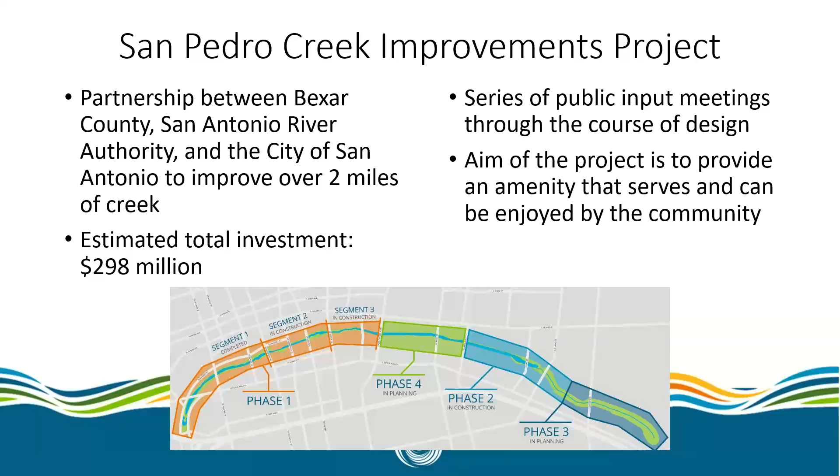We did have a series of public input meetings throughout the course of design. We welcome all tourists and visitors from out of town to the park; however, the vision and design of this project was geared to the people who live and work in San Antonio and Bexar County. So the aim of the project is to provide an amenity to the people who live here that can be enjoyed by the community — something you'll be proud of, something you'll also take your out-of-town relatives and friends to see in addition to the Riverwalk.

The main project goal here is flood control. The Bexar County funding is flood control dollars. There's about a 45 square mile area that drains into San Pedro Creek, and we do have the flood control tunnel. This is to capture all the runoff that comes in between the tunnel inlet and outlet, as there's frequent flooding during heavy rain events.

But that's not the only goal — we had additional goals. Water quality is a core value and mission of the San Antonio River Authority, and as such we're incorporating low-impact development features, mechanical devices, and aquatic plantings to help improve water quality. Of course, with any public works project, realizing a benefit through economic development is always a plus, and this project is expected to return about $1.5 billion for that $300 million investment.

I mentioned community engagement before. We had a series of public meetings and asked for input from members of the public on the design, and they were very well attended throughout. One of the things that was very important was to emphasize the cultural history and heritage and the linkages of San Pedro Creek to the culture in this area.

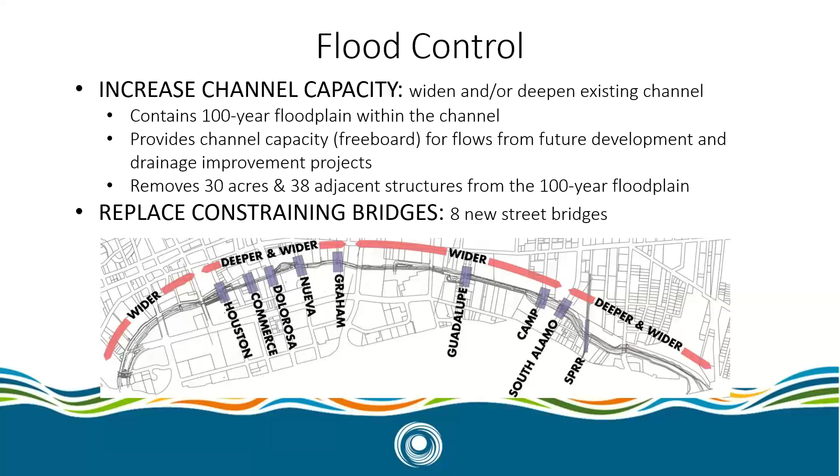To do that, we're having to replace 8 bridges, which you can see in the inset below. We've already replaced the Commerce and Dolorosa Street bridges, and right now, very near the site, they're working on replacing the Houston Street Bridge. Next slide, please.

Just real quick, this is a representation of the area from Houston Street upstream. At the very top, you can see the track around the old former Fox Tech football field, and the tunnel inlet structure is just below that. The blue indicates the 100-year floodplain. On the left is before project completion; afterwards is final completion, and you can see it's contained completely within the channel in the after picture.

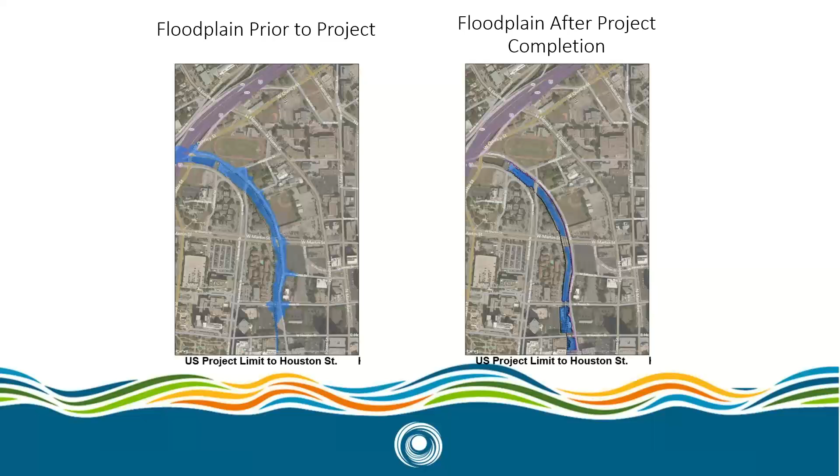As they started digging more gingerly and investigating, we uncovered a series of foundations. So right now, this public meeting and this effort is to determine what we do with those foundations moving forward.

The plaza design incorporated feedback from the community, including stakeholders nearby like Texas Public Radio and the Alameda Theater. The intent was to have a public gathering space that could provide activation and programming opportunities, and would also bring people closer to San Pedro Creek.

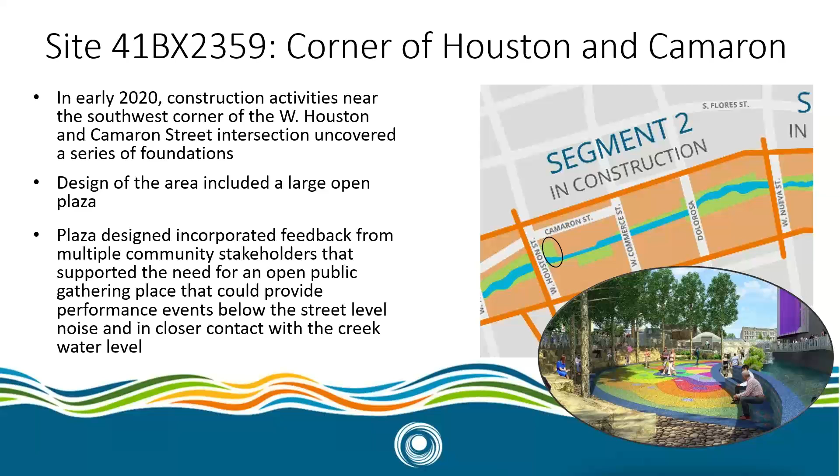So at that point, we're now looking at the options. I'm going to stop and turn it over to Steve Tomka to talk more about the discovery at the site. One thing I want to reemphasize, as Steve will note, is that we feel all the options give a great representation of the history—the differences are in what each option provides and the impacts to the design and the project. That's why we're here, and we need your help. We know this is extremely important, and we've always held it to be so, but we need help determining what to do.

So with that, I'll turn it over to Steve Tomka. Thank you very much. Thank you so much, Carrie. I appreciate the opportunity to speak to everybody about the archaeological finds.

As we began research—and by 'we' I mean a large number of individuals from a number of institutions—specialists in historic and archaeological research, including our archaeological team, historians from the City of San Antonio's Office of Historic Preservation, and even the Center for Archaeological Research at the University of Texas at San Antonio, got involved.

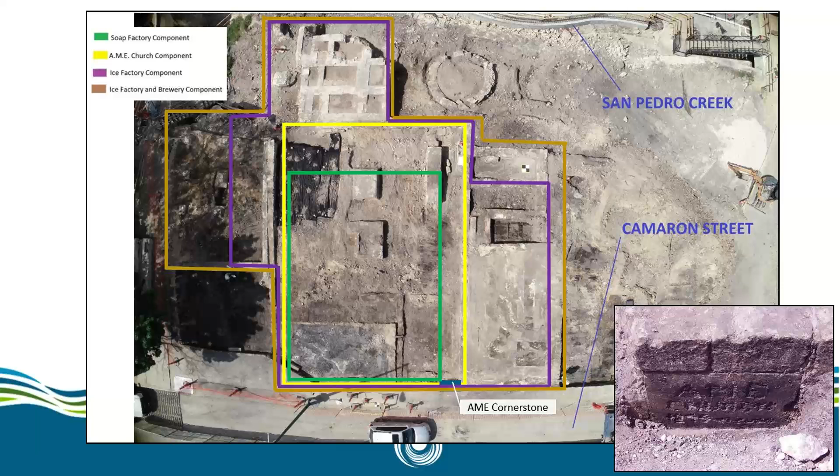In the inset now, we're looking at a slightly different orientation. Camaron Street is at the right-hand side of the image, the creek is at the left-hand side, and Houston Street would be at the top of the image itself.

As we started doing the historic research as well as the archaeological research, we identified the earliest component, marked in a greenish color, as the Klemcke/Menger soap factory—really a candle and soap factory component—followed by the AME Church that lasted about 6 years.

Thereafter, the Alamo Ice Company, Alamo Ice and Brewing Company, and then the Alamo Brewery, which finally closed in 1904. The color schemes at the bottom of the inset image show, as far as we can tell today, which set of foundations go with which one of those components.

You will see that as each component came about, they swallowed up or grew around the original component, which was the soap factory component, which, as far as we can tell as of now, sits basically inside the outlines of the AME Church, shown in yellow in this image.

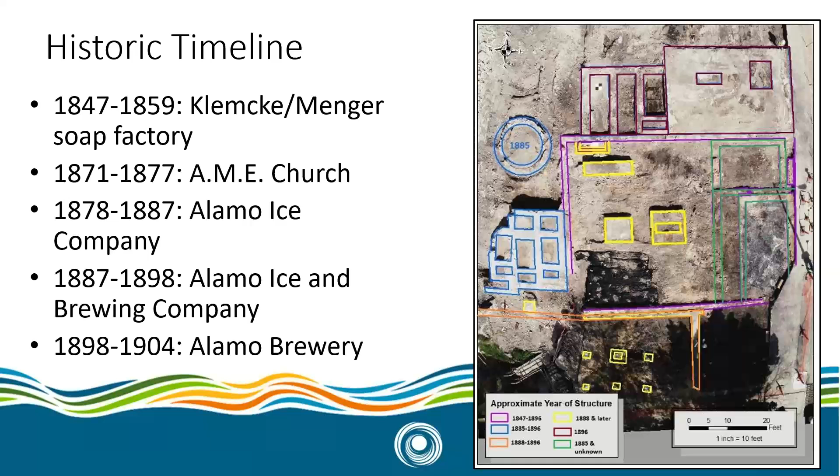Next slide, please. As I mentioned, the very first component was founded by the Klemcke and Menger families. Wilhelm Klemcke came first, a German immigrant, and he and his family came to Texas in the 1840s, 1847. He started a soap factory, candle factory on the property.

The inset image is an overview of the upper center portion of the image, where the soap factory would have been built. As far as we can tell, there were probably two structures that were part of that soap candle factory: one was possibly a one-room house, residential house for him and his family, and the other was probably the soap factory portion itself.

We anticipate that both of those ruins would have been inside of the church, or at least one of them inside the church that came later, and the other extended all the way perhaps to San Pedro Creek. In 1851 is when he does the construction, adding value to the property, at which point Simon Menger, unrelated to the Menger family that owned the...

...Menger Hotel, came about. He was also a German immigrant, also had known how to make soap from the old country. He came by, purchased the property from the Klemckes, and sort of industrialized the process of soap manufacture in San Antonio.

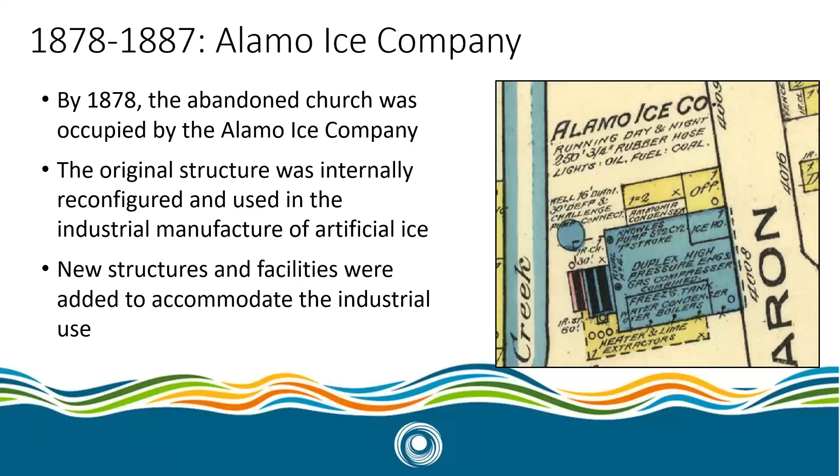As we move into the next phase, we connect the story of ice manufacture to the story of lager beer, German lager beer manufacture. Lager beer tastes better than the English warm pub beers, and it was taking hold in the U.S. by the late 19th century. But the downside was that in order to brew lager beer, you had to store it in colder temperatures.

The fermentation process called for colder temperatures than the British beers required, and because of that cooler requirement, you couldn't brew large quantities of it—you could only do it mainly in the north where winter temperatures were cold enough. So the manufacture of artificial ice opened the potential to industrially spread the brewing of lager, German style lager beers, across the nation.

A couple of smart entrepreneurs in San Antonio realized this connection and married the two into one facility—the manufacture of artificial ice and German style beer brewing—into the Alamo Ice and Brewing Company. You see the footprint of that facility now on the inset.

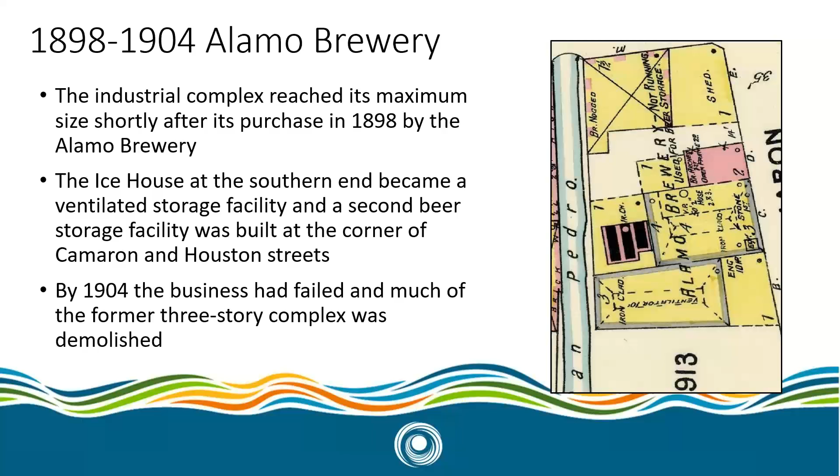By 1904, only a handful of small buildings remained, used ancillarily to store beer brewed by other companies on the premises. Next slide, please.

So now when we're talking about the significance of these foundations and the significance of the history to San Antonio, we have to relate the two together. Buildings and foundations are significant because they illustrate for us a significant element of the history of the city itself. We have the history related to the early industrialization in San Antonio, and just as importantly, the history of the AME Church, African Methodist Episcopal Church, and its beginnings, how it came to flourish in San Antonio, and what an important role it played in the African American community especially.

So when we consider the importance of the foundations, we have to look at which foundations represent which of these historic parts, and also which elements still present in the ground are sufficiently intact for us to tell the story of the industrialization and the story of the AME Church. We're looking both at the National Register of Historic Places significance, at the federal level, and then at a second aspect, the state level, the State Antiquities Code or State Antiquities Landmark level.

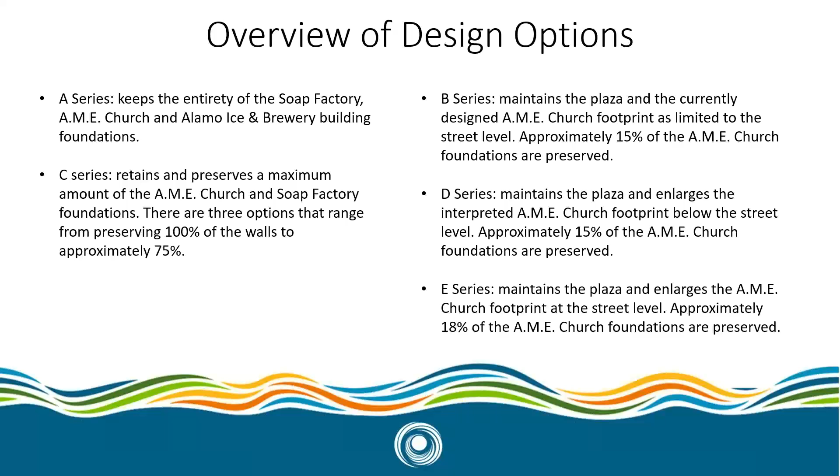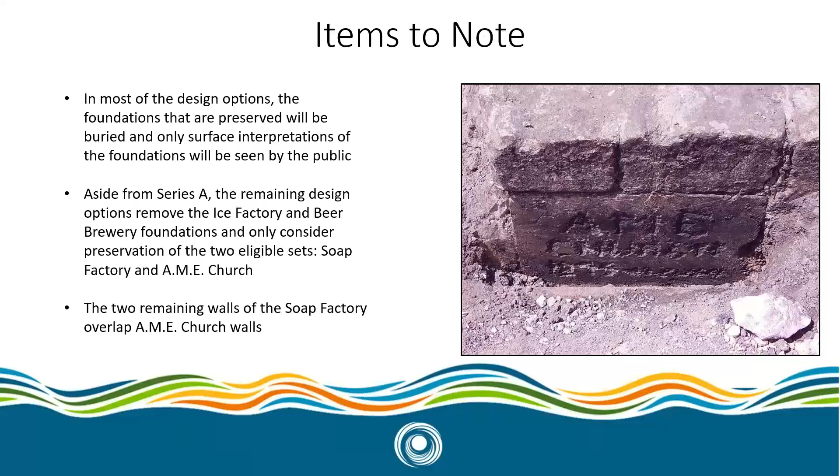Let's move on to the first approach we looked at, which is to say that everything there now needs to stay - the soap factory, the AME church, and all of the ice and brewery foundations still extant in the ground. In order to keep all of that there, and still not completely undo the conveyance itself, you'd have to do some pretty major things. You'd have to basically - and you see the representation of all the foundations there in the different colored outlines.

But you'd have to actually take down the new West Bank Paseo that we had built along the Alameda Theater. That's at the lower portion of this plan. Camaron Street is at the upper part, Houston Street is to the left, basically upstream to the left and downstream to the right.

So in tearing out what has already been built for a West Bank Paseo, in order to take it back to what was at least close to the original channel width there, you'd also have to build back bridges to accommodate the exiting needed from the Alameda Theater. You see on the lower left and lower right corner these bridges that go across the creek.

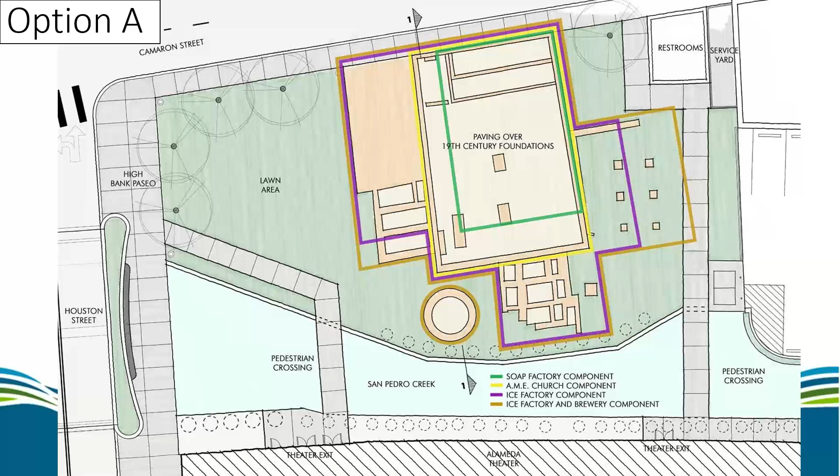The rest of the site, we do have a major restroom facility there that would obviously have to be reduced so it doesn't encroach into the foundations. We didn't develop a detailed design approach to the rest of the site, other than it would be some sort of grassy lawn area, park-like area around those foundations. Exactly how they would be covered up and paved over or interpreted would be part of a design exercise in detail, much beyond. But this idea gives you a pretty good idea of what we would have to change to keep everything that's there now. Next slide, please.

So those impacts are considerable. It essentially negates the project flood control goals, because there'll be no capacity in the channel to accept flows from any future development or drainage improvement projects. And there are several City of San Antonio projects already planned to alleviate flooding in upstream neighborhoods that would have to be reconsidered.

Flood events at or above the 100-year could cause flows to spill out of the channel into adjacent properties, and regaining that lost flood control would require substantial disruption to the preserved foundations, either boring a tunnel under or temporary relocation of the foundations to allow installation of culverts below them. That would be a very serious practical challenge for the engineering.

In terms of cultural and social impacts, there is some limited capacity for events compared to what the original plaza design was able to accommodate. The potential for reducing pedestrian traffic means less exposure to the history of the site. A major point is that the whole design of this project, in terms of flood control on the basis of a linear park, was to allow closer contact between the water and people, with the low bank paseo and high bank paseo. Since we wouldn't have that, with a much reduced channel, we really would not have that type of aesthetic connection between people and water evident in the rest of the park.

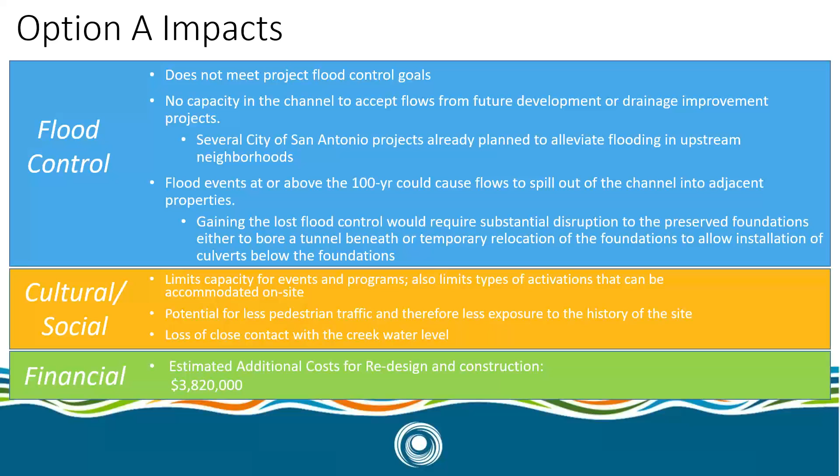Financially, this is really the largest expenditure we could imagine, close to $4 million in additional costs and redesign, and it has the biggest financial impact and the biggest flood control impact on the project with this approach. So let's move on to some other ideas in approaching this project.

Next slide. So we're going to look at 3 different variations on this approach, which is to say what's important is to keep the foundations of the AME church, but also to visualize at the street level the footprint of the church. You see just right of center that large rectangle represents the about 40-foot by 60-foot area of the AME church.

You can see there would be some sort of stone paving that outlines the perimeter of the walls. The walls would be saved, but in order to save those walls you have to build some fairly significant concrete infrastructure around it with a pier wall, to retain the foundations, and to protect them from any kind of flooding or erosive conditions of floodwater.

That does allow us to keep the West Bank paseo next to the Alameda Theater, but it doesn't allow us to provide the low bank paseo on the East Bank. So instead of it continuing through and connecting the way it had before, we'd have to bring that ramp up between the church foundation and Houston Street.

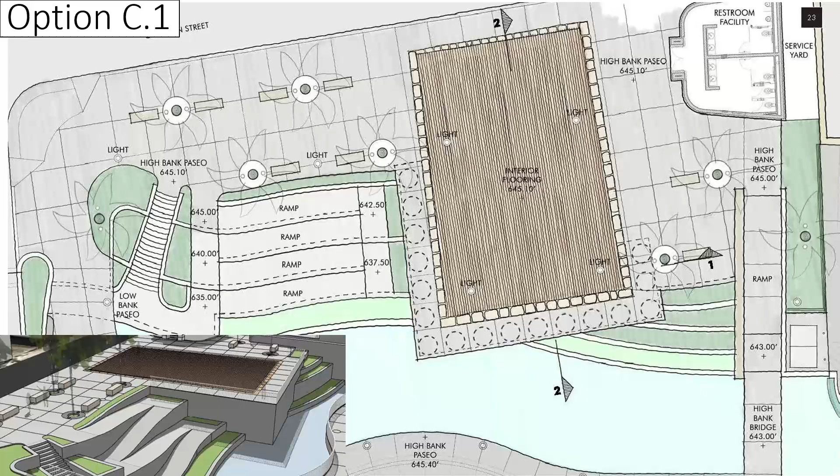So you see that plaza area is really taken up — half of that plaza area is taken up by ramps just for accessibility. You can see in the lower left-hand corner this kind of 3D image, as you would be looking from a bird's eye aerial from Houston Street downstream, seeing those ramps, and then just beyond the footprint of the church retained by those concrete pier walls. If you could move to the next slide, please.

An alternative would be to say we can't keep 100% of the foundation walls. What we want to do is relieve some of the impact on the flood control, so if we lop off that northwest corner, the lower left-hand corner of the church foundation, we could maintain at least some semblance of that channel width. That would still allow us to provide the low bank paseo to come through and up the ramp on the south side, in the way it had before. We would not be able to provide much of a mid-level plaza area, but we could provide a grassy slope between the street level and the low bank paseo, to the left of the church footprint.

So this is a variation that does diminish to some degree the actual foundations. It leaves a little more up to the imagination about the actual footprint of the church, but it does show quite a bit of what is there.

We looked at another option trying to reconcile a bit of those. That is, to go ahead and lop off that corner, losing those church foundations at the northwest, but in the new construction, extend and cantilever the floor plate of the church itself, so you could get a full interpretation of the church footprint, even though there would be some reduction in the actual historical remains. You would have to raise the floor elevation of the church about 6 inches above the existing street level, and lower the paseo a little to get that clearance underneath.

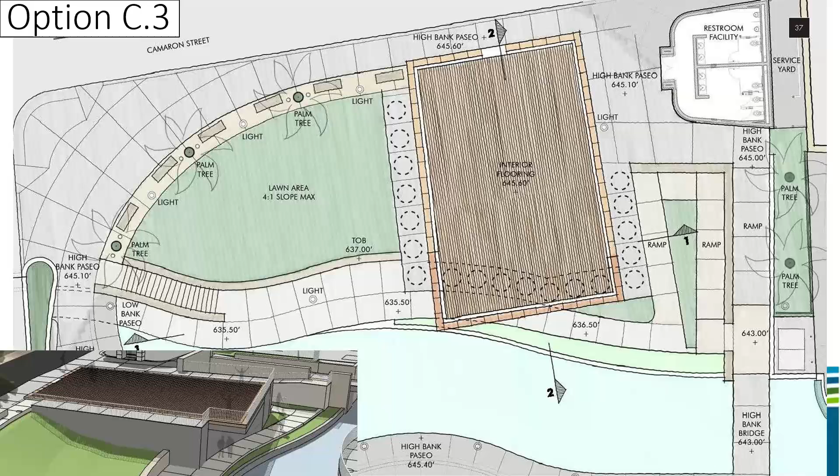This would be a compromise between trying to retain as much of the foundations while also conveying the whole idea of the original footprint of the church. So those are the three options in this particular approach.

Essentially, they still don't meet the project flood control goals, although there is definitely more improvement than in the first option. Existing 100-year flows will be contained within the channel, but we don't have capacity to accept flows from future development, and events above the 100-year would still spill out over the channel onto adjacent properties. The difference in this design approach is that it changes the nature in which assembly and performance was anticipated in the original plaza design, limiting to some degree how that is activated.

Probably a little less pedestrian traffic, especially for the first option that interrupts the low bank paseo. It also eliminates that performance venue configuration that was in the original plaza design, though it does add a bit of green lawn, which is always nice in an urban condition like this project.

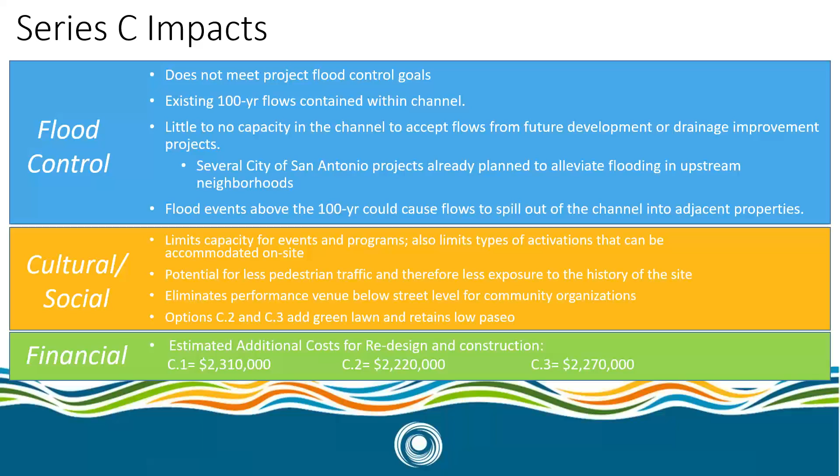So let's go on to a couple other reconsiderations. Next slide, please.

This is going back to the current design of the plaza itself, this semicircular plaza that is about 7 feet lower than the street level and about 5 feet above the water level. It's a mid-level plaza area with basically stone terraces along the perimeter that retain the street level, but also provide informal seating around that plaza.

This is pretty much just a bit more articulation of what we had in the original design. You can see in the top edge along Camaron Street, the eastern portion of the AME church. This footprint would be the remnant footprint of the church itself, with all of the foundations removed at that point.

Instead of just having a paving pattern flush along the sidewalk there along Camaron, the idea would be that you could raise up the walls a little bit with some stone to give some differentiation between what is at the street and that interior portion of the footprint. That would be an improvement upon just having it

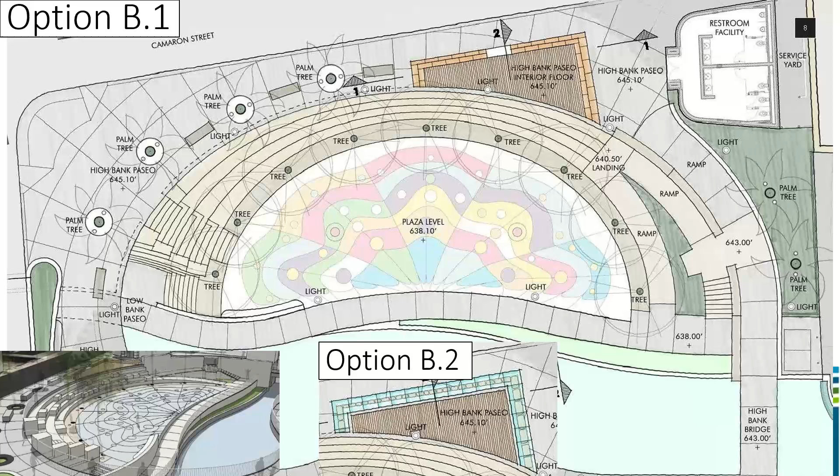If we go to the next slide, we'll see those impacts. We'll come back to all of those in a minute, but in moving past just treating the existing design a little bit different, we looked at two other options.

One, this option B on the left-hand side, was actually to go ahead and excavate down to the historic floor level of the church itself. Like Dr. Tumpke mentioned, that cornerstone is buried several feet below the existing street level. We know the grade in that area has actually been brought up over time three or four feet, higher than it was historically. So the idea here is you would take this down to the original or close to the original floor level of the church itself and expose those interior walls, the interior surface of the walls.

You would get access to it off of the landing at the existing designed ramp and encroach into the plaza seating area so that you would have a larger footprint. You would have it sequestered from the street, so it's a little more private and distinct from both the street level and the plaza level.

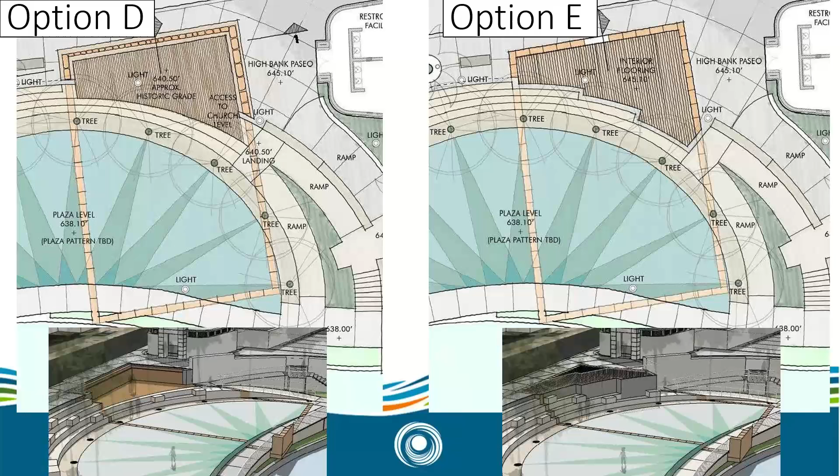But also extending, just like in option D, the perimeter of the church in terms of the way it lays over the existing or designed landscape. So the sense here is that we would be draping the footprint of the church over the terrain, the new design terrain, rather than trying to keep it all at one single level.

If you go to the next slide, I think we have a comparison of all the B, D, and E impacts. On all of these, the project goals are maintained. The project flood control goals are maintained. The 100-year floodplain is contained in the channel. The flows for future development, drainage, are not impacted. It does maintain the intended use as an event space by the River Authority, Alameda Theater, and Texas Public Radio.

It provides increased seating and shade. It still keeps a large public gathering space below the street level noise and in closer contact with the water. And it does still provide the ADA accessible low bank paseo for close connection to the creek. They are very close in range.

B1, the first one, is a little under 900,000. B2, the one with the glass, certainly several hundred thousand dollars more, just to deal with the treatment of the stone walls. And then in D and E, basically about 1.2 million for each of those.

So those impacts are less than the others, there's no question about that, but it is a different approach. It depends a little bit more on the interpretive approach than retaining the entirety of the foundations. But that gives you a good idea of what we think covers a fairly wide range of approaches to the project. Again, the actual design detail would be developed after a consensus on a preferred approach could be determined.

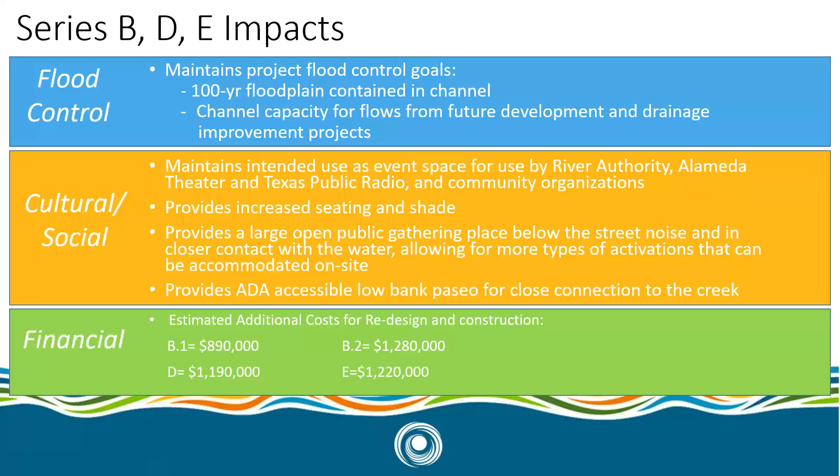Great, thank you, Steve. And now we have Ms. Carrie Brown, the River Authority Public Art Curator. She'll be presenting on interpretive strategies. Go ahead, Carrie. Great, good evening, everyone. Monica, you can go ahead to the next slide. So I'm just going to take a few minutes to talk to you all about the interpretive strategies that we have implemented at the park.

First, our interpretive panels. The image on the right shows what they look like. We currently have 18 on the site, and all of them are written by local historians, and all panels are approved by the Bexar County Historical Commission. We do quite often bring in subject matter experts to ensure that the information is accurate. For this site, we will have a panel dedicated to the information that was discovered here. As Steve mentioned, with all the design options, the foundations are buried underground, so having something like this that allows us to show those images of the foundations as well as the cornerstone will be really important. So we will have a dedicated panel here.

The topics for the interpretive panels come from our interpretive plan, which I know Monica is going to touch on in her slides. The next strategy that we've implemented is digital delivery of information, and this includes our website. On our website, we're able to include a lot more information, and we can also link to other resources, so here we can really take a deeper dive with the information. That also includes our mobile app. With the mobile app, you can take a self-guided audio tour, and again, that allows us another tool to disseminate the information.

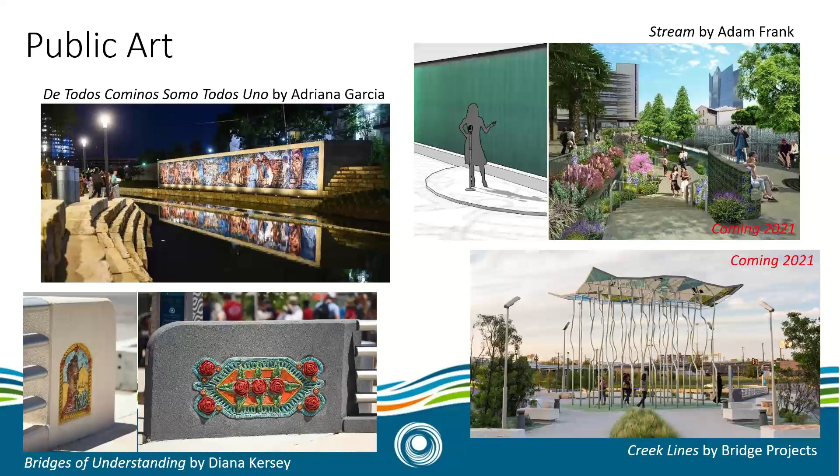So I wanted to quickly touch base on the previous efforts of public involvement on the archaeological site in general. We completed an interpretive plan for San Pedro Creek Culture Park that was executed by Dr. Ann Toxey of Toxey, McMillan and Associates. An interpretive plan is an initial step in the planning and design process for informal learning-based institutions like parks and other cultural facilities, where interpretation is used to communicate messages, stories, and information on experiences. It incorporates elements of culture and history, guides the design of the project, and complements the master public art plan that Carrie mentioned.

This effort entailed an extensive process of researching and collaboration, and it was a good year and a half in the making. For the interpretive plan effort, Carrie Brown and I facilitated a committee of 21 members of the community, ranging from historians, community leaders, and appointed subject matter experts, and they provided guidance to Dr. Toxey on the interpretive plan.

For our interpretive sign topics, the AME Church, the Soapworks, Alamo Icehouse Brewery, and the Klumpke topics were most definitely included in the interpretive plan and interpretive signage content, fully recognized and vetted by this group. To see a full list of the group, you can also go to the website, where we have all of the members of the interpretive plan listed.

So this was prior to the archaeological discovery, and shortly after the discovery, Carrie Brown and I, along with the project team, facilitated a focus group per the direction of Bexar County leadership. The initial members of the focus group later grew a bit after the first meeting. This group consisted of AME church leadership, historians, and African American community experts, and they provided additional resources and feedback to the project team. We'd like to commend the focus group for their amazing work and thank them for their time and efforts on this very important project. Their early contributions were extremely notable and necessary in the research stage of this effort.